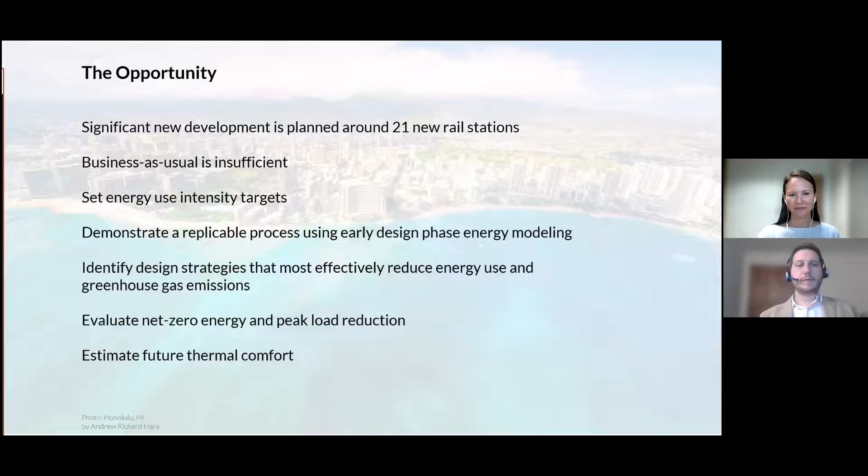Most of the presentation that Elliott and I will share is based on our article, long title, Evaluating Energy Targets and Efficiency Measures in Multifamily Subtropical Buildings Through Automated Simulation. It was published in Technology, Architecture, and Design in 2021, and it is free to access online. It is based on work by a larger team at the UH Environmental Research and Design Lab and WSP.

The team simulated a conceptual design for two multifamily residential buildings shown here. The conceptual building massing was in the earliest stages of consideration for development by the State of Hawaii Office of Planning and the UHCDC. We simulated two 5-story buildings, each with an exterior walkway and 40 one-bedroom dwelling units per building. Although we analyzed this specific building, the energy targets and efficiency measures that we share today are intended to apply widely to future residential buildings in Honolulu, and the process may be replicated for different building types.

The simulation engine Energy Plus 8.9 was used through the Rhino 6 software's Grasshopper plugins called Honeybee and Ironbug.

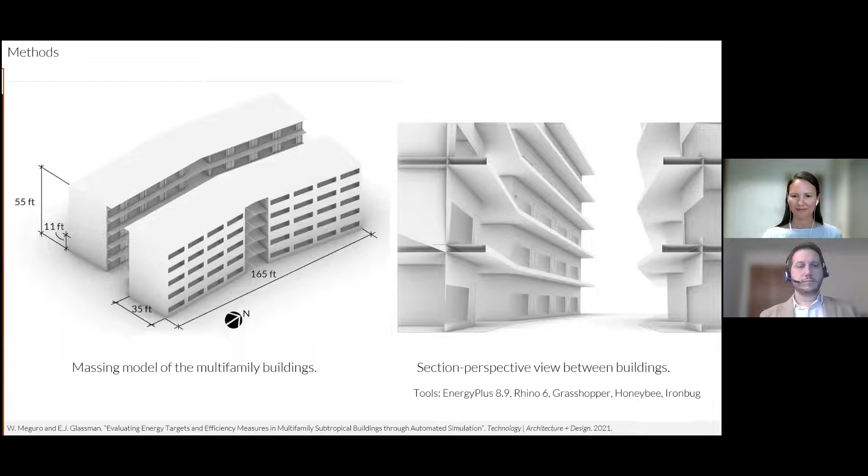First, we'll share a process and resources to set building energy use intensity targets. In order to set building energy goals prior to commencing energy modeling, the team compared the energy use intensities for peer buildings using data on existing and simulated buildings from CBECS, Energy Star, Hawaii Energy, and the New Buildings Institute.

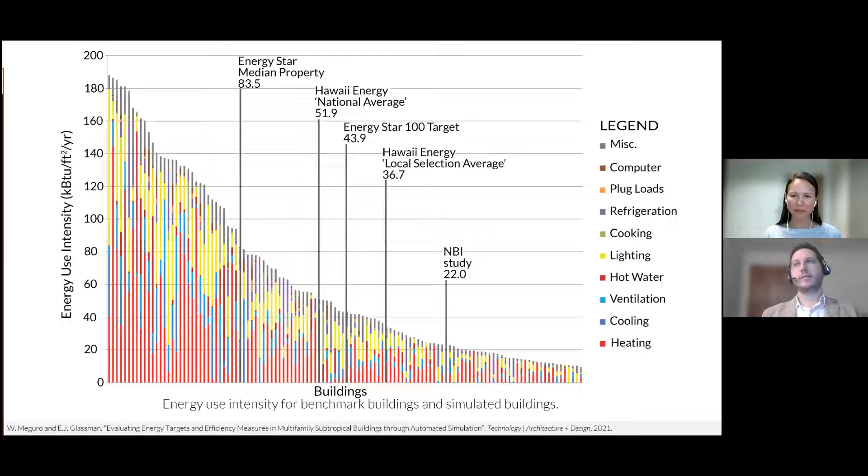In this graph, each bar represents a building with a relatively similar climate and program, and you can see the large range of EUIs.

Design teams in the audience can follow a similar process to set EUI targets using the resources shown on this and the following slide, including Hawaii Energy's benchmarking website, the Zero tool, New Building Institute's Zero Energy Commercial Building Targets, CBECS, Energy Star Target Finder, which references CBECS, and in addition, during design, teams may track their predicted EUI using the AIA Design Data Exchange.

Now, I'll give a preview of the energy modeling results as compared to these benchmark buildings. We simulated an energy model called IECC 2015 baseline that minimally complies with the Hawaii State Energy Code prescriptive requirements. The team observed that the simulated IECC 2015 baseline building EUI was only 8% lower than the average EUI of existing multifamily developments in Hawaii.

This indicates that driving building energy consumption down dramatically will require much more than just code minimum design. We also modeled other combinations of energy efficiency measures and were able to reduce the EUI to 14.9 and 10.9 kBTU per square foot per year, which is far below the peer buildings.

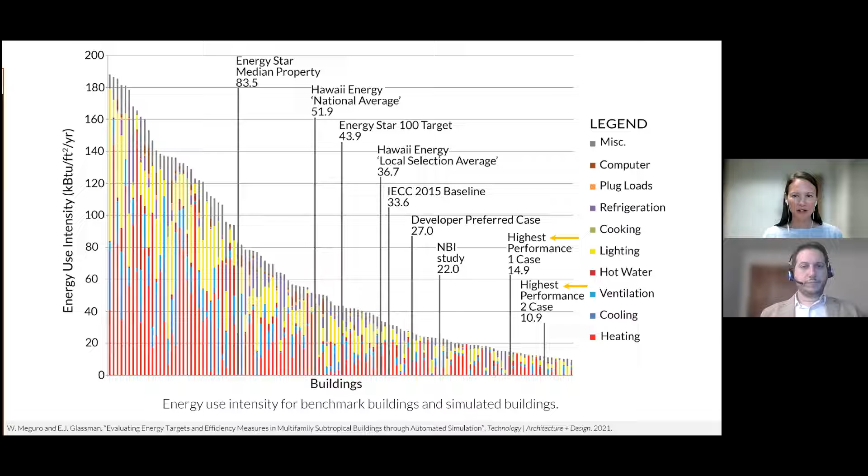For each aspect of the building design, such as envelope, plug loads, air conditioning, ventilation, domestic hot water, and lighting, we first identified parameters that would be compliant with the IECC 2015 prescriptive requirements, and then selected two degrees of improved performance options for each category to study.

Now, a standard approach to this type of energy analysis may include modeling variables independently or modeling a number of predetermined combinations of design inputs, then comparing these scenarios to the baseline. But that approach risks missing interactions between different energy conserving measures, where the impact may be more or less than the sum of the parts.

So we use automation to run all the possible combinations of the design variables and then created a large data set representing the whole range of possible performance outcomes.

The entire design space was visualized on this chart called a parallel coordinates plot. Each scenario that we modeled was represented with a single line connecting the input variables that define the case with the corresponding outputs on the columns on the right.

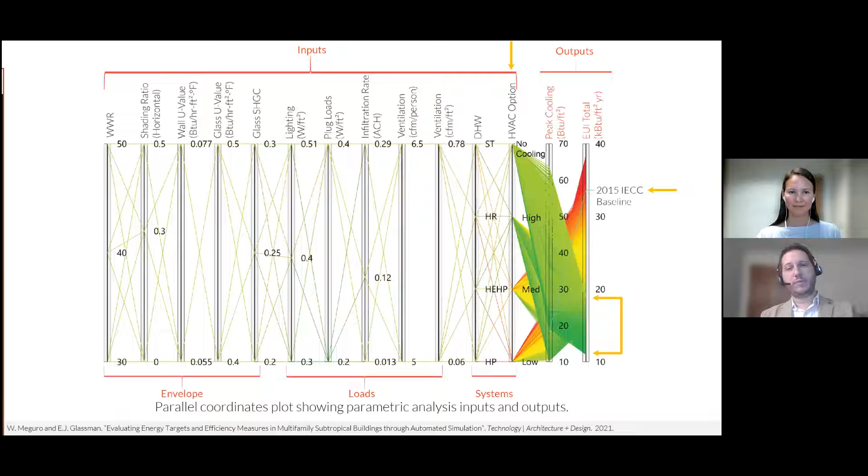From this plot, it was apparent that the high efficiency HVAC and passive cooling cases provided the overall best energy performance. The data set plotted on the parallel coordinates plot could be dynamically sifted by constraining desired outcomes or design variables, input variables, to identify the remaining pathways to high performance outcomes.

Another way we viewed the data was a sensitivity analysis of each individual variable on EUI. The length of each bar represents the range of possible outcomes given the single fixed variable. The color coding represents the percentage improvement from the worst performing option within each grouping. The greener the color and the smaller the range, the more impactful that individual variable is towards improvement of EUI.

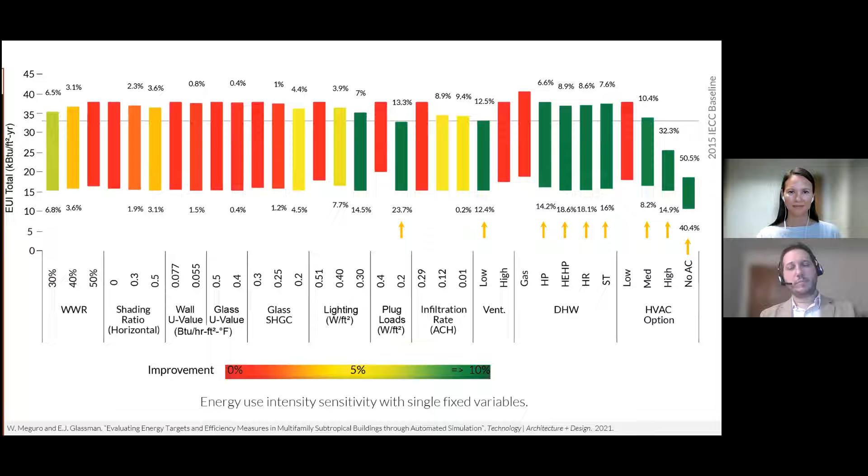Now, this analysis illustrated that HVAC type, plug loads, domestic hot water system selection, and ventilation rates had the greatest impact on overall energy use. So to visualize that, here we summarize the active strategies that design teams may utilize for greatest annual energy savings.

We saw that the most impactful strategy by far is to use either passive cooling or a high efficiency split air conditioning system with heat recovery ventilation and programmable thermostats. Also, provide fresh air at the minimum ventilation rate.

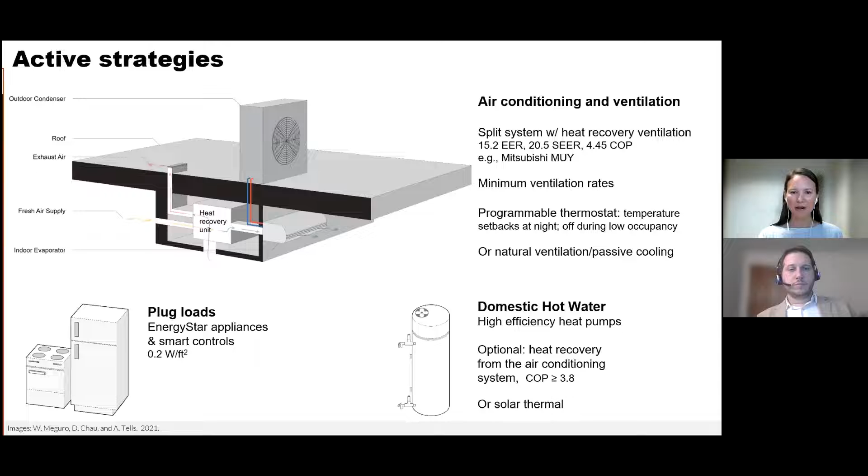Next, reduce plug loads with Energy Star appliances and smart controls. For domestic hot water, use high efficiency heat pumps with or without heat recovery from the air conditioning system, or solar thermal.

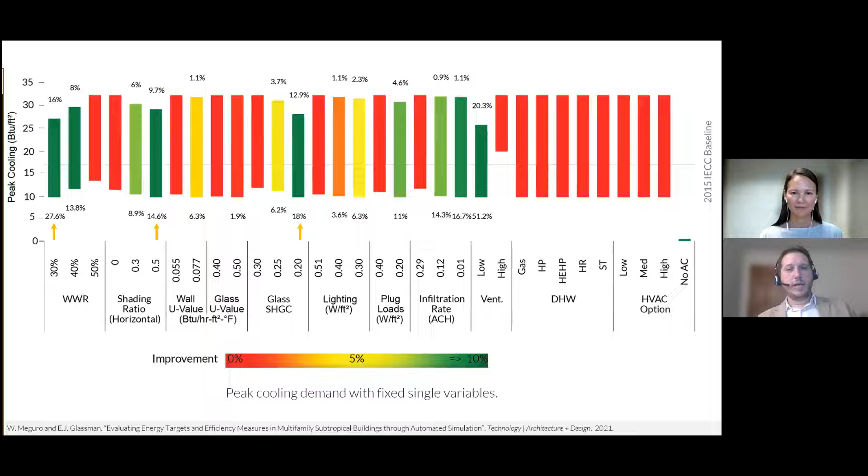And we applied the same sensitivity analysis, not just on EUI, but also on peak cooling loads, which revealed that the most impactful variables in this case were reducing window to wall ratio and enhancing solar protection through improved glazing and exterior shading.

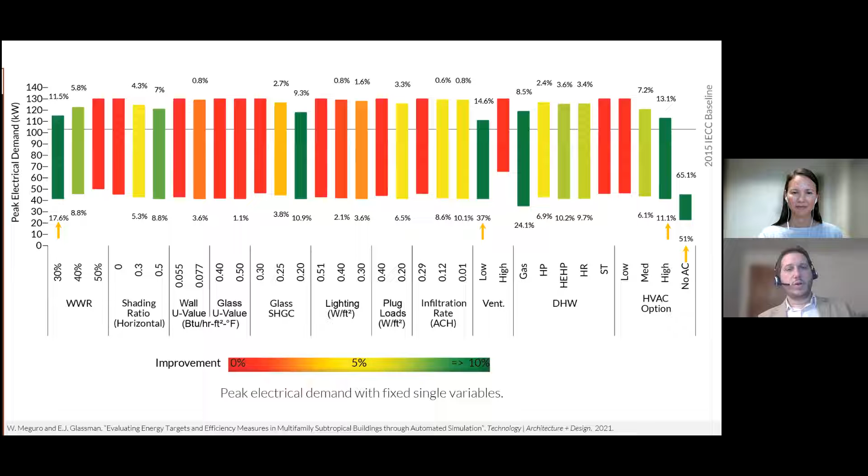The facade properties that lowered solar loads and the HVAC selection were both important for reducing the building's peak electrical demand.

Passive strategy takeaways included specifying a stringent solar heat gain coefficient for the glazing, using the code prescribed window to wall ratio of 30%, and incorporating exterior shading with a 0.5 projection factor.

Also, where the site allows, design teams should orient the building to have long north and south facades, which receive less solar radiation than the east and west facades.

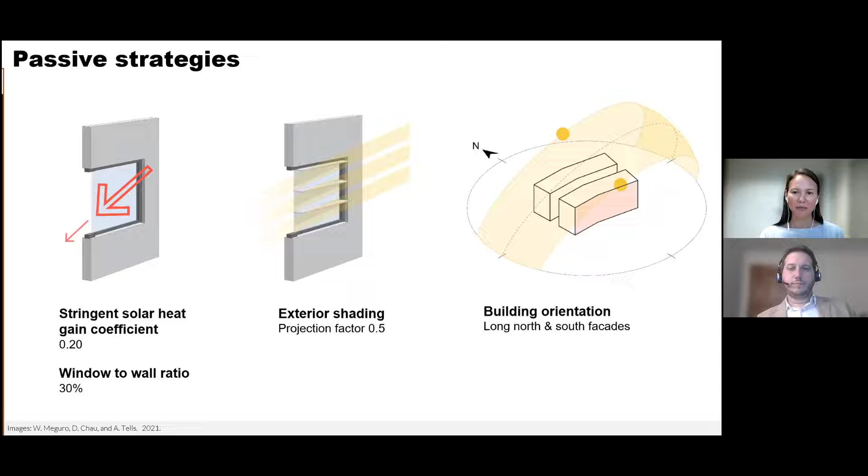When testing the impact of orientation on the baseline building model, we found that those long north and south facades resulted in a 4% energy savings and a 19% peak cooling savings as compared to the same building rotated 90 degrees. So now that we know the most effective energy efficiency measures, how much energy savings is possible when we combine them?

Based on the observations from the parametric analysis and the complete data set, the team generated selected combinations of variables that were most impactful when modeled together, and then compared them to the IECC baseline case. The table shows these combinations and the parameters selected for each.

The first combination, entitled Developer Preferred, included energy efficient measures that the team deemed likely to be employed if the state were to develop the building today. Inputs were based on recommendations from the NBI Multifamily Guide and the team's professional experience.

The two highest performance combinations demonstrated the best performance achievable with current technology. The aggressive yet feasible EUIs in the highest performance cases could inform state targets or code alternative compliance paths.

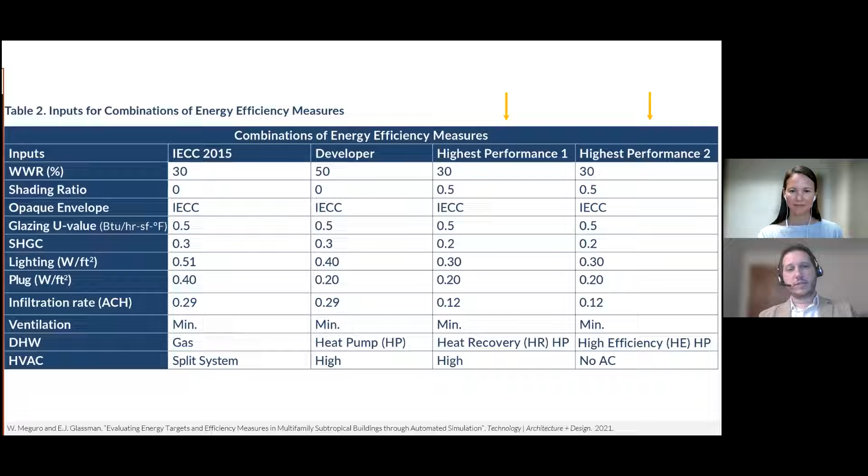The highest performance combinations 1 and 2 include lower window to wall ratios, external shading, a stringent solar heat gain coefficient, high performance cooling and ventilation, lower lighting power density, limited plug loads, a moderate facade infiltration rate, and a high efficiency heat pump water heater. The highest performance combination 1 has mechanical cooling and ventilation, whereas combination 2 uses passive cooling and natural ventilation.

Here are the results. The combinations of energy efficiency measures show potential for moderate or significant savings of energy, energy cost, and emissions. The developer preferred case's estimated EUI is 27 kBTU per square foot per year, a 19% improvement over the IECC 2015 baseline. But the highest performing case's estimated EUI is 14.9 with full mechanical cooling, or 10.9 without mechanical cooling. This is a 56 and 68% reduction, respectively, compared to the baseline case. As we mentioned earlier, this is far below the benchmark buildings.

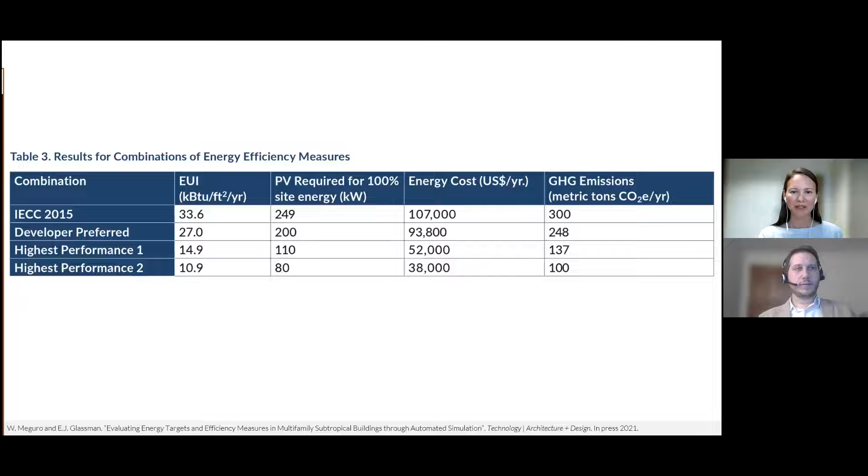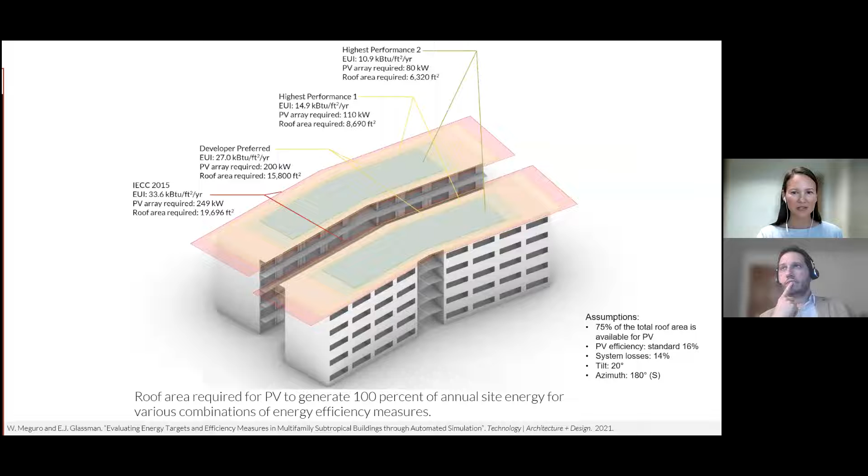So can this 5-story multifamily building be net zero site energy? This image illustrates the roof area required to generate 100% of the annual site energy for each of the combinations of energy efficiency measures. Rooftop PV can offset the highest performance combination's site energy use, but not the IECC baseline or developer preferred combinations. Electricity generated by rooftop PV is not sufficient to offset the annual source energy use for any of the simulated combinations.

What is the size of a battery system that could shave at least 10% of the building's estimated peak electricity demand? 10% is the threshold for the LEED version 4 Energy and Atmosphere Credit 4 regarding demand response.

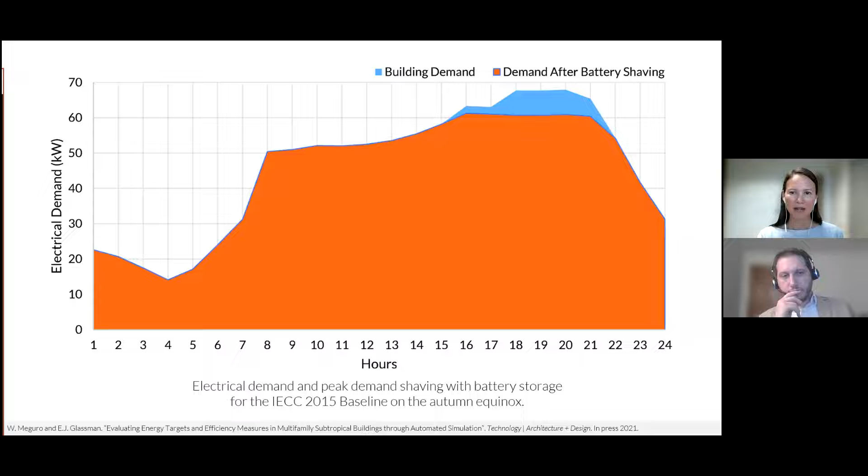We know Honolulu will be hotter in the future, but how much hotter? And what does that mean for people's thermal comfort in Honolulu's many multifamily buildings without mechanical cooling? We simulated an unconditioned version of the baseline multifamily building using 8 different future weather files. The weather files are based on the 2014 Intergovernmental Panel on Climate Change, IPCC, report, using 2 greenhouse gas emissions scenarios: one in which greenhouse gas emissions peak at 2040 and then decline, and another in which greenhouse gas emissions rise through the year 2100.

Using the ASHRAE 55 adaptive comfort standard, the baseline multifamily building is currently estimated to be comfortable about 88% of the time without fans and 96% of the time with fans. The simulation estimates it is comfortable significantly less often in the future, as low as 75% of the time in 2050 and 58% of the time in 2080.

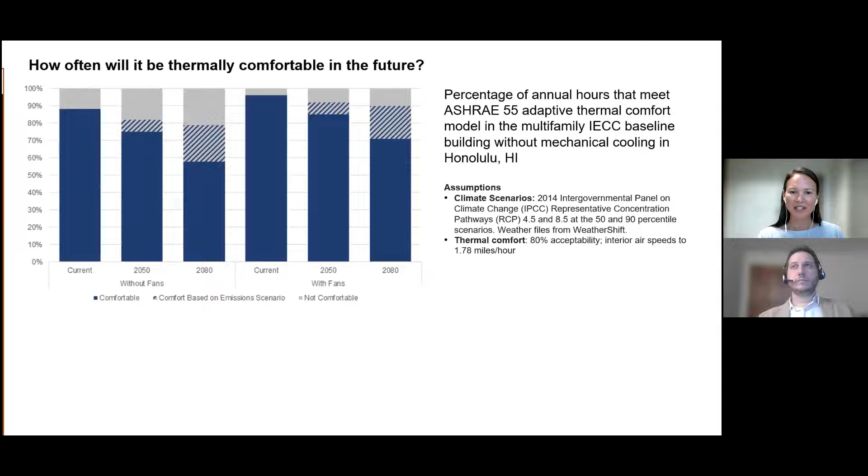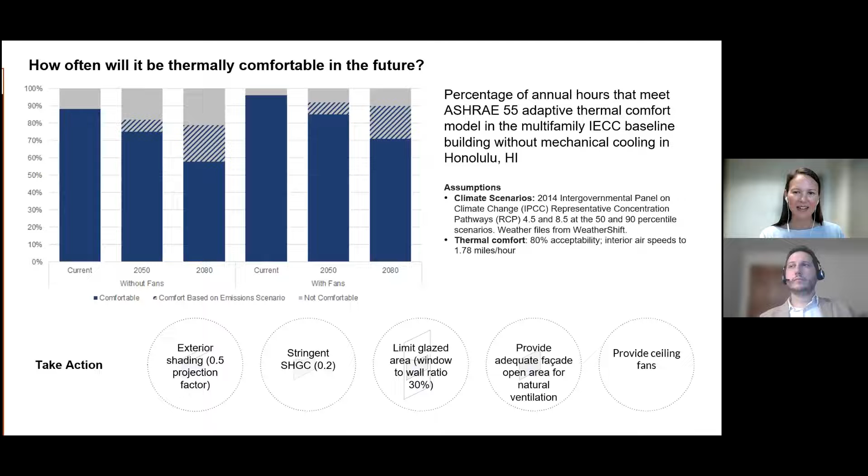So what can the audience do now? Reduce building heat gain with exterior shading, specify glazing with a stringent solar heat gain coefficient, limit the glazed area, provide adequate facade open area for natural ventilation, and provide ceiling fans.

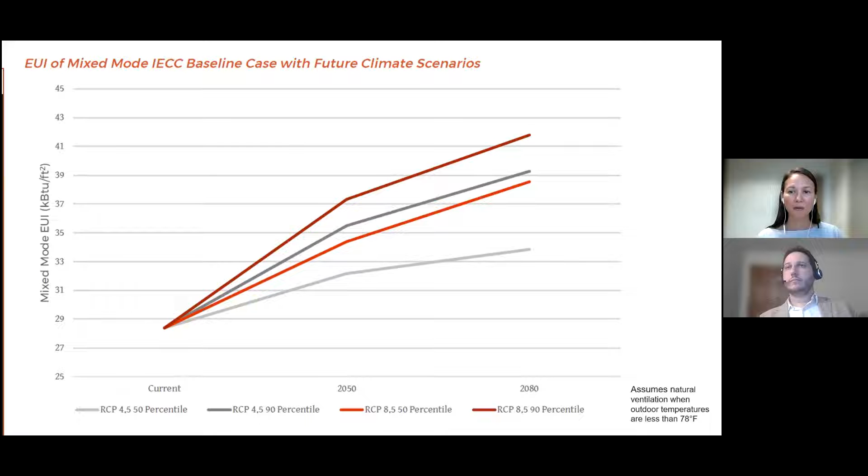Moving on from the unconditioned building, what happens in a mixed mode building? Using the future climate scenarios, we studied the increased future energy use in a version of the baseline multifamily building with mixed mode ventilation. Hotter future climate scenarios mean the opportunity for natural ventilation will decrease over time, increasing the building's energy use intensity from approximately 29 kBTU per square foot per year today to approximately 34 to 42 in the year 2080. This increased energy use impacts demand on the electrical grid or on-site renewable energy sizing.

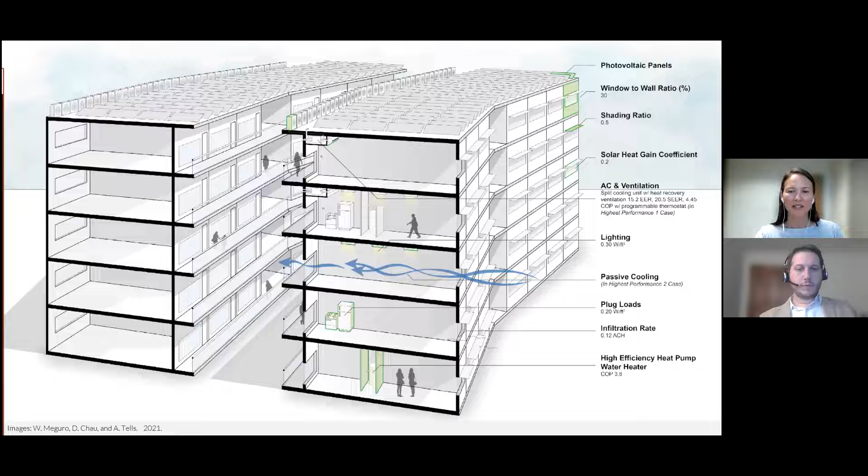In summary, designers and policymakers may use this new quantified information to significantly reduce energy use, greenhouse gas emissions, and peak electrical load in multifamily buildings in subtropical climates. Architects and utility providers may use the estimates of poorer thermal comfort and increased energy use with the future climate scenarios to inform their building designs and craft financial incentives.

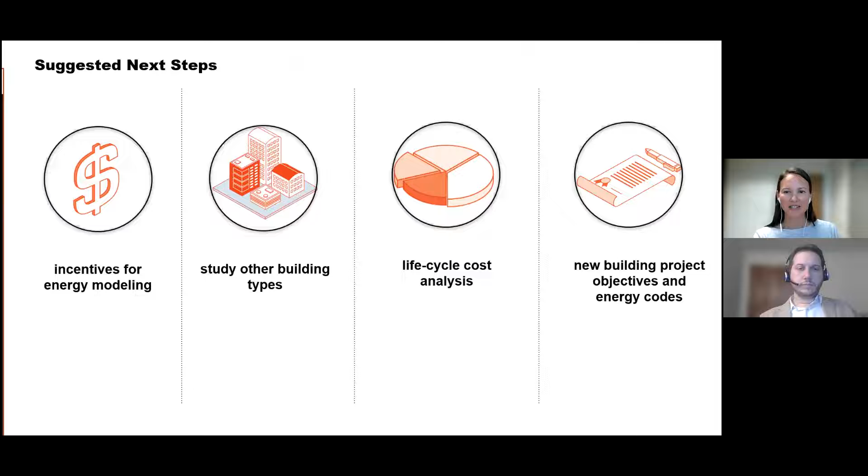The team discussed the application of this study with leaders from the State of Hawaii Office of Planning, the State of Hawaii Energy Office, and Hawaii Energy. Some of the suggested next steps included crafting financial incentives for energy modeling, conducting similar studies for other building types, conducting a Hawaii-based life cycle cost analysis, and incorporating energy targets and efficiency strategies into new building project objectives and energy codes.

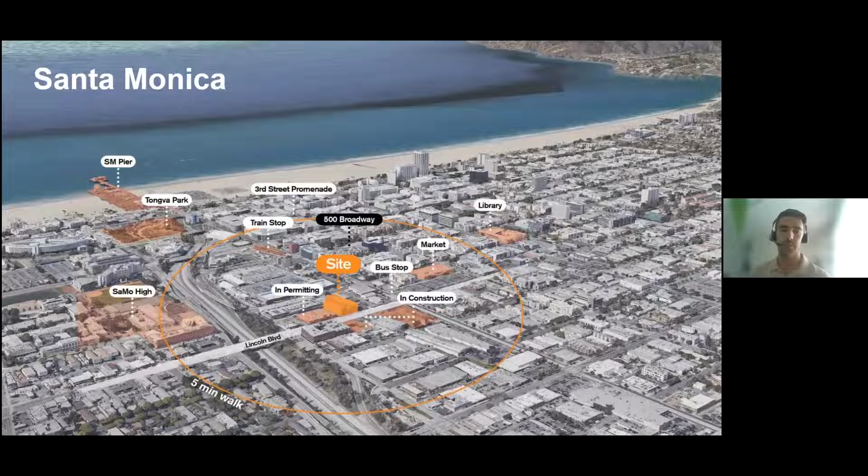Here's an image of the local context at the block scale. There's lots of construction going on. The Arroyo was essentially a pilot project for this area. 10 years ago, you probably would have seen single-story commercial development and Lincoln Boulevard as primarily a vehicular thoroughfare, but you can see on the left and bottom of the screen how much construction is going on now.

The Arroyo was essentially the first high-density multifamily project located in this area. We believe affordable housing can act as a catalyst for developments that are dense and pedestrian friendly. Previously, this area was not very pedestrian friendly.

So who lives at the Arroyo? There's 64 families, so it's a 64-unit project, with 63 cars, which is actually less than would normally be required for a market rate project. It's actually below zoning requirements.

The reason we provide parking, even if it's not required by code, is because a lot of low-income housing residents do depend on the car for their livelihood. So when we're thinking about the tenant, we want to make sure we're providing the amenities they need so they can maintain their livelihood.

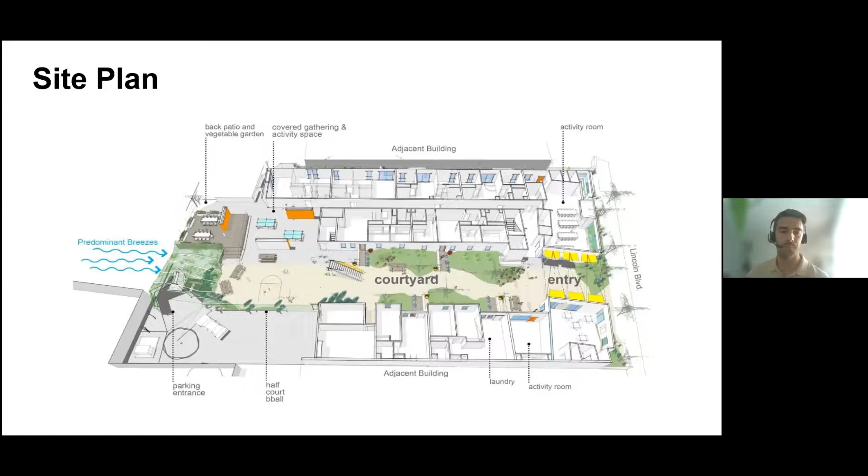It's almost like a little oasis because Lincoln Boulevard is a heavily trafficked street. So we really want to make sure that when we're doing affordable housing in an urban infill situation, that the project feels domestic and that the residents can feel at home. And landscaping has a big role in that.

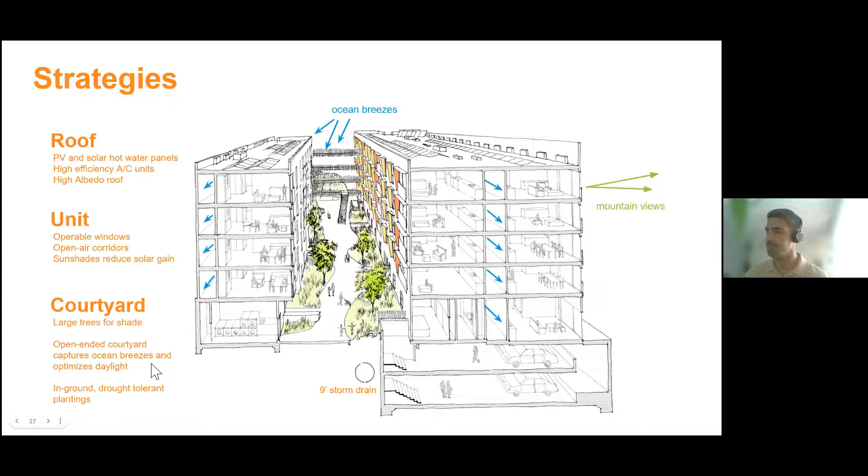On the roof, PV and solar hot water panels, high efficiency AC units, high albedo cool roof. For units, operable windows, open air corridors and sunshades, and in the courtyard, large trees for shade, an open-ended courtyard, and drought tolerant plantings, where you can see where the storm drain is located.

On an urban infill project, it can be very difficult to reach net zero. Even if in theory you covered 100% of the roof, you may be able to get there, but a lot of times it's not practical.

This shows where the mechanical mini splits are located for the individual units, and this shows the amount of space that's taken up by the solar thermal system.

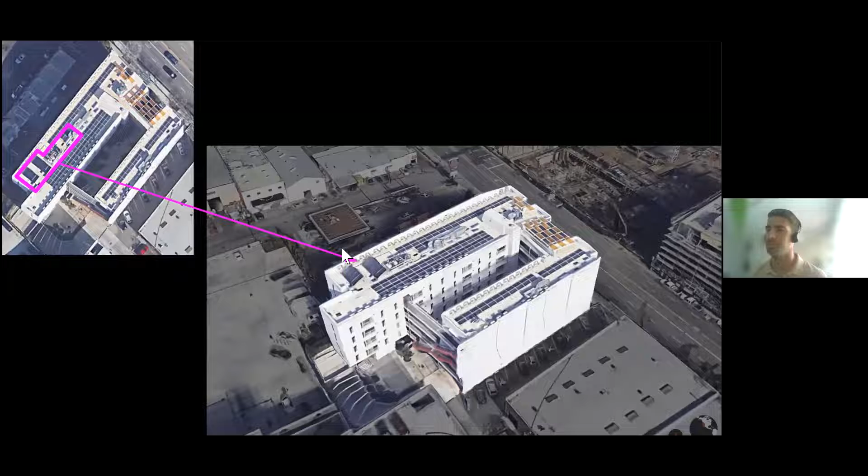This was done on a previous code cycle, the 2016 code, where you got more benefit in your state energy modeling software for solar thermal with gas preheat versus heat pump water heaters, which hadn't really been integrated into the software yet. So it was really more of a benefit for our compliance to provide the solar thermal system, even though the efficiency is not as great as doing all PVs with heat pump water heaters, and it's also quite expensive to provide this infrastructure. It shows how things have changed in a short amount of time.

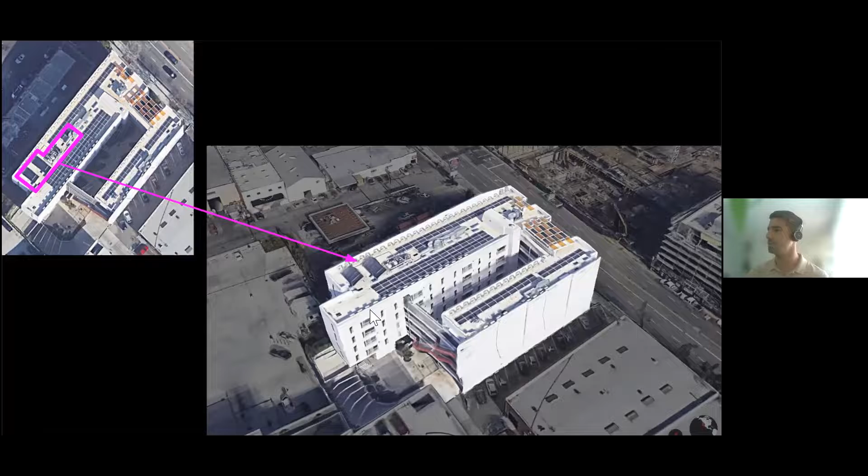For a one-bedroom unit like this, it's also cost effective to do individual fan coils instead of the ducted system. It tends to be a cost benefit.

We provide MERV 13 filters instead of MERV 8. That's becoming fairly standard now, especially as we're dealing more with fires.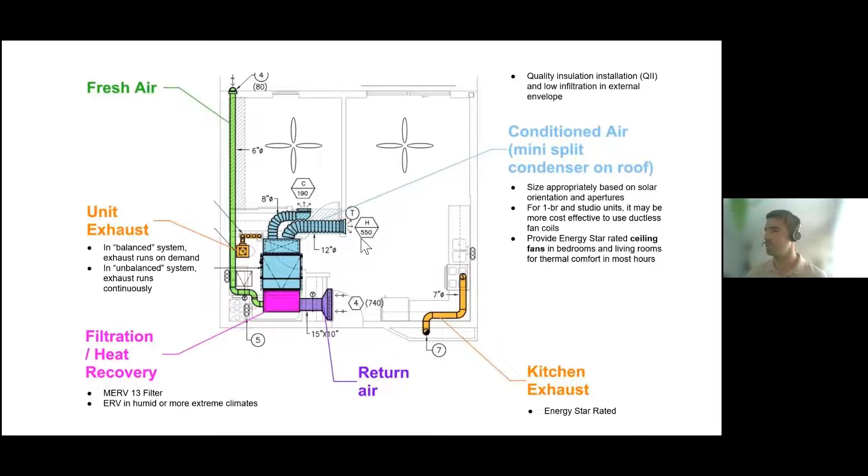In California, you can currently do balanced or unbalanced ventilation. In a balanced system, you have ducted fresh air that's filtered and is kind of on demand, whereas in unbalanced, the exhaust fan runs continuously and fresh air comes in through leakage. We're sort of preferring that fresh air is ducted now, since fires have become a more acute issue and air quality is a more acute issue. So we'd actually prefer to continue doing this method.

The gas boiler, so you can kind of see the complexity of the infrastructure that's required for a gas boiler.

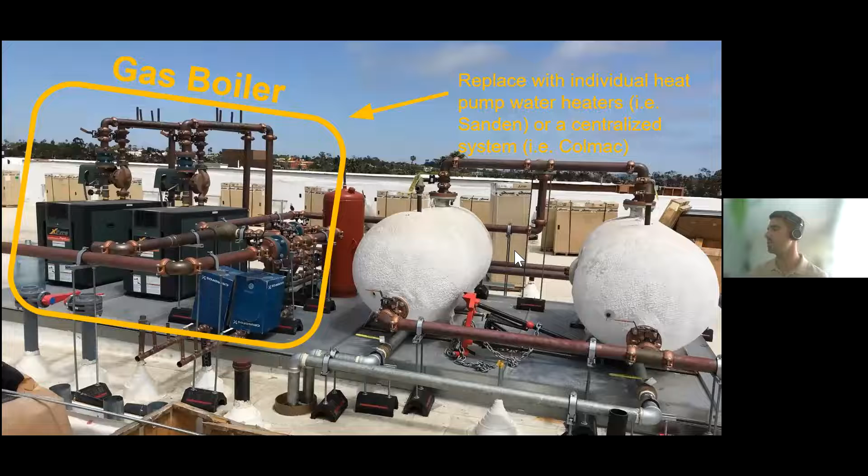If we were doing this project today, we may replace it with individual heat pump water heaters like a Sanden, or a centralized system like Colmac.

And then the size of the solar thermal storage tank is also quite large, so you have to account for that as well.

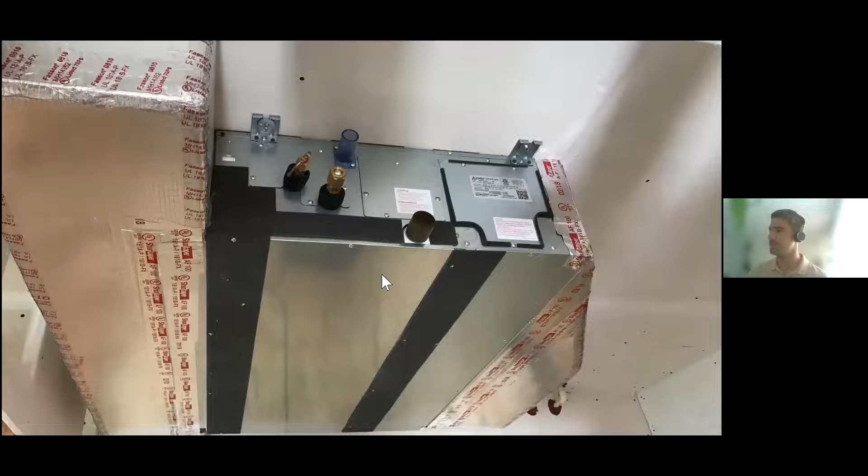This is an interesting image because it kind of explains how zoning restrictions make it so floor-to-floor height is very tight. So the market has sort of dictated that you get these super slim mechanical units, and this just kind of shows how much space they take up in the soffit.

We call them pancake units.

And then a summary of the performance metrics: performance beyond Title 24, which is the state code, is 19.8% better than Title 24. And there's also additional open space added beyond code required, 16.2.

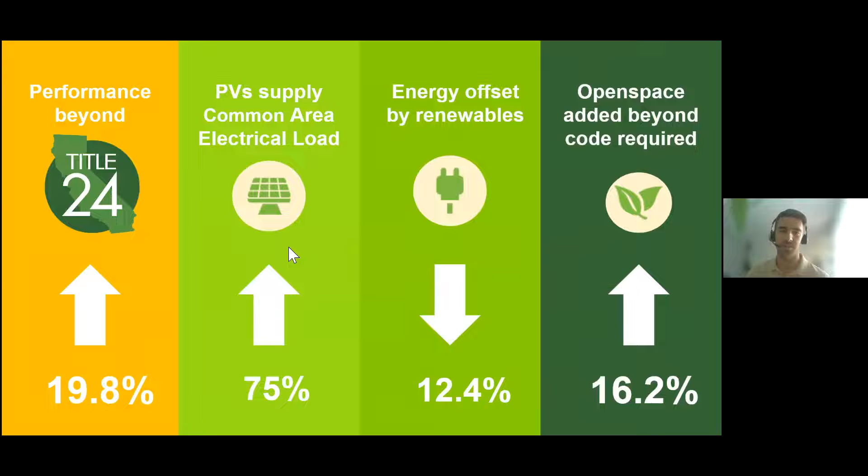This is something we try to achieve in most of our projects, because open space tends to be a very desirable amenity.

A summary of the LEED project checklist, so this was sort of our final point total. I think our performance was decent in energy, but we did quite well in sustainable sites, which goes to the urban infill nature of this project and its location close to transportation, schools, and other community amenities.

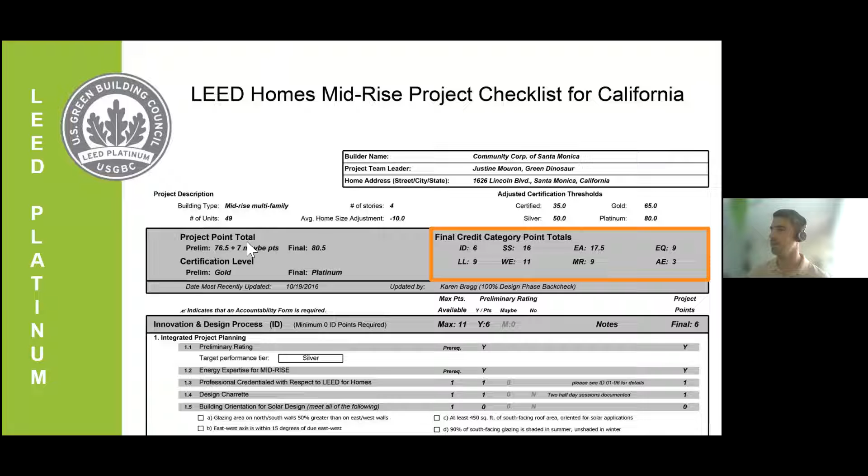So big picture, I think in addition to talking about housing in terms of decarbonization and energy efficiency, we have to talk about it as a unit of social equity. It really contributes to the resilience of cities and to the resilience of neighborhoods.

It's also a fundamental economic building block. So when we're talking about getting units to market, we have to consider why does it take so long and why is it so expensive. We're really trying to bring it to market faster and less expensive.

These priorities sometimes can be seen as competing with sustainability, but it doesn't necessarily have to be that way. We have to think of them all at the same time, because a resilient city is a more sustainable city, and a key characteristic of a resilient city is one that doesn't have as acute a housing crisis.

Also focus on industry, which is inputs, versus market, which is outputs. LEED and other scoring systems were focused more on the market, sort of marketing the work we're doing, but in the future we'll focus more on industry and what goes into the building. That means thinking about the present and the future, and also doing more post-occupancy evaluations, going back to these projects years later and seeing how we're doing.

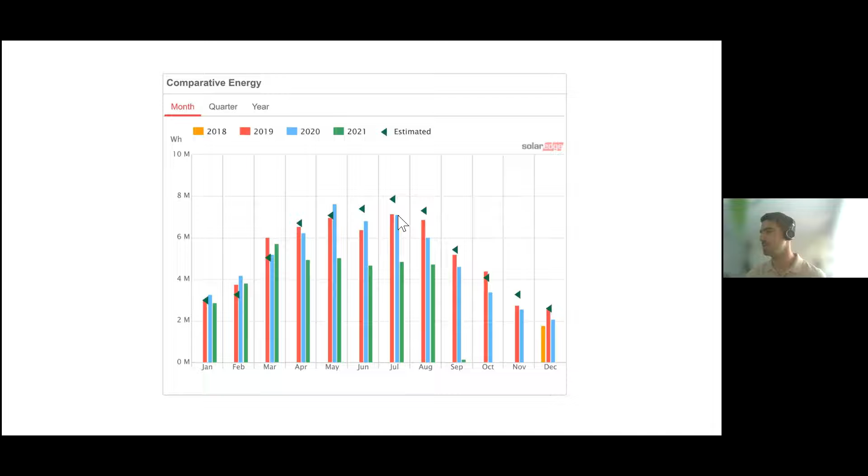Hard to say what the reason for that is, but one possible reason is that the solar panels haven't been cleaned, and it's really important to clean them in Los Angeles because they can get quite dirty just from ambient air. I was actually on a project this morning checking out the thermal array, and it was actually very dirty.

Domestic water use: the project uses on average around 300,000 gallons of water per month for 64 residential units. Interestingly, looking at utility bills, we found that 60% of the total was just for the common laundry room, because we used EPA WaterSense, very low flow water fixtures for all the other fixtures in the units. So it ends up being that the laundry room uses a majority of the water.

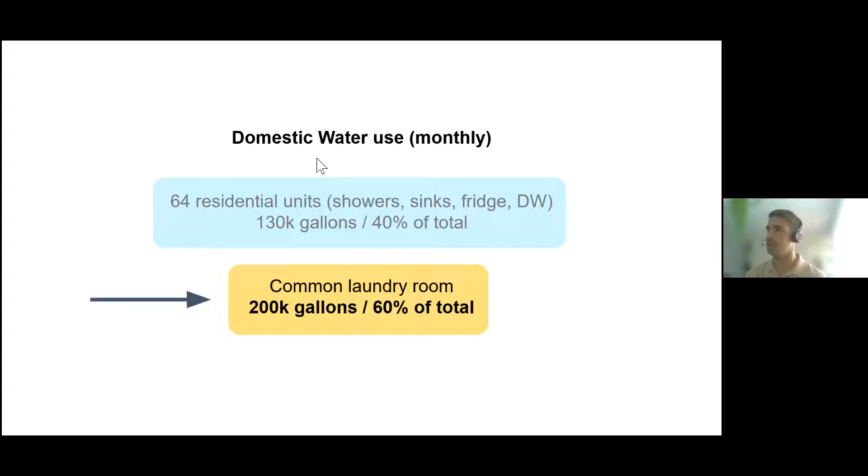That's important when you're deciding to do things like gray water systems. You really don't get much cost value from doing gray water systems for units, not only because it's not using as much water, but also because it requires additional health department permits, making it a much more complicated system. Santa Monica actually allows you to do gray water for laundry rooms without additional permits, which supports that strategy.

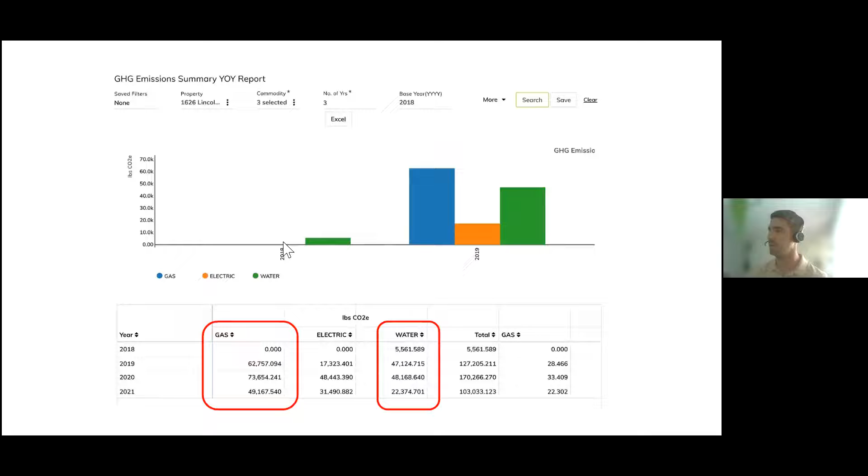And so that's it for the Arroyo. I'll talk for a second about policy, getting involved in shaping policy. There are ways to take action and get involved. One is primarily through local government, planning commission, technical advisory roles on writing policy like Zero Code.

You can also write letters and give testimony. There are numerous professional organizations like the AIA Committee on the Environment, US Green Building Council, ILFI, and others, where in addition to doing outstanding work, you can also help raise the floor on a lot of these sustainability issues by helping to shape policy. I think it's really important as architects to get involved in these processes and understand how they work.

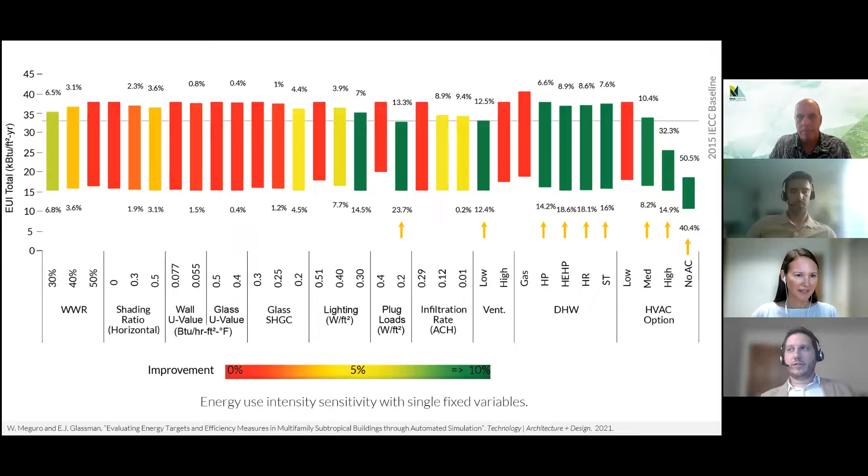Yeah, and it's definitely a challenge because it's not just energy, but health and wellness, not just when there's a pandemic happening, but under normal circumstances. Air quality in spaces keeps people more alert, healthy. John had mentioned before the MERV 13 filters that are in the Arroyo that have a pressure loss in the ducts, which can increase energy use. So that is one area where there's sometimes a trade-off between ventilation and energy use.

But the hope is, especially in climates like Honolulu, like Los Angeles, where there's great opportunity for natural ventilation and ways of having thermal comfort with natural ventilation, even if it's assisted by fans, as long as the building creatively, like the Arroyo does, has these big openings to get a lot of ventilation. I think that could be an effective way of reducing energy use, connecting people with the outdoors, addressing these concerns, but at the same time being low energy, taking advantage of the wonderful climates you have.

Yeah, we're finding that our development partners are starting to become more concerned about air quality in the units. And it's not just due to smog, which was a problem on the Arroyo due to the proximity to the freeway, but also due to wildfires, which have become an acute problem in Southern California over the last 5 years. And it really got us thinking, maybe because the code changed, I think in the last code cycle, to kind of go back more towards, you could either do a balanced or unbalanced system. So the balanced system is fresh air that's ducted and filtered with on-demand exhausts, or you could do an unbalanced system, which was basically natural ventilation with an exhaust fan that's continuously running.